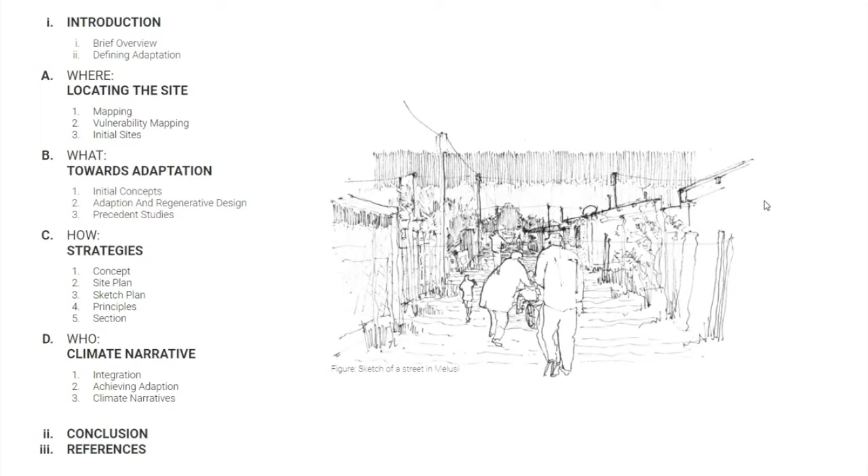I'll introduce the project and its intention, breaking it down into where it's located, what the intervention is, how it will be implemented, and who it's meant for, while also reflecting on the success of the process at the end.

This is Melusi, or a view into the formalizing parts of the neighborhood, and your first impression is as good as mine. We weren't able to visit the site because of lockdown regulations, but despite that, the brief challenged us to develop a clinic and research center site as a catalyst to implement long-term climate adaptation solutions and achieve climate change transformation.

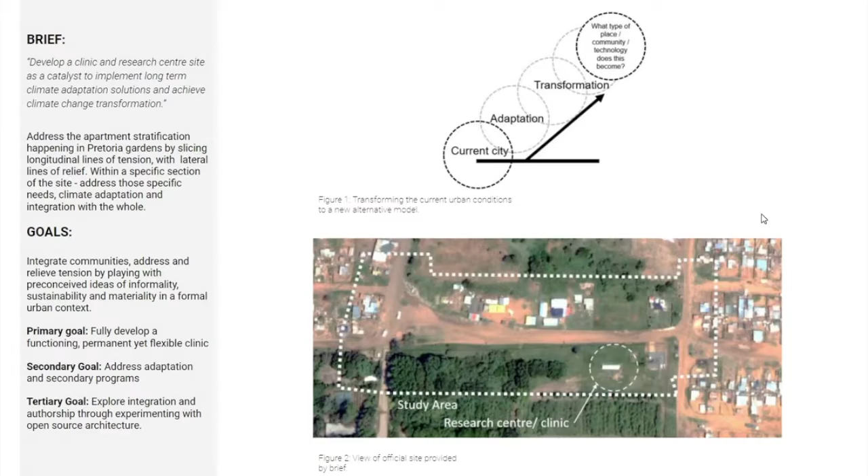I quickly aligned with the brief after our group mapping exercises and spectating previous workshops on what the community wanted and needed. Personally, my goal is to help integrate communities and relieve tension effectively by playing with the preconceived ideas of sustainability, materiality, and informality surrounded by a formal urban context.

Developing a functioning yet flexible permanent clinic was of primary concern, along with supporting programs that further the adaptive argument. Of course, to implement adaptive strategies, we need to understand the concept itself within this context.

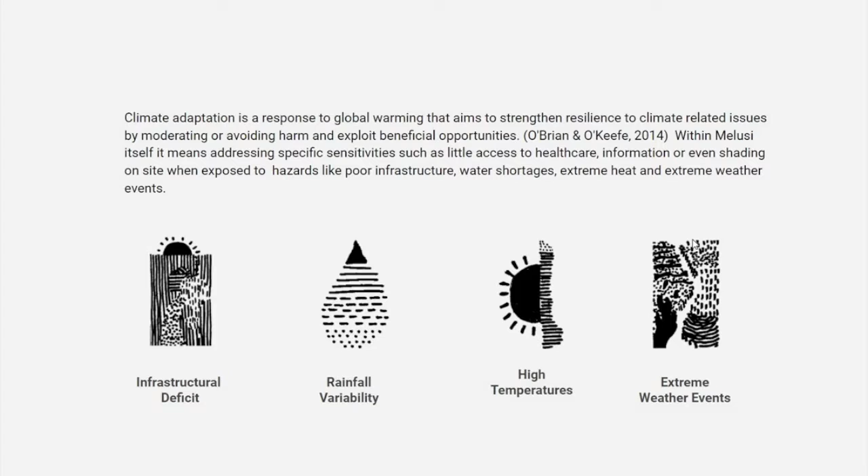Adaptation is a response to global warming that aims to strengthen resilience to climate-related issues by moderating or avoiding harm and exploiting beneficial opportunities. Within Melusi itself, it means addressing specific sensitivities such as little access to healthcare, information, or even shading on site when exposed to hazards like poor infrastructure, water shortages, extreme heat, and extreme weather events. That's a mouthful, but we're only scratching the surface on what effects historic and present marginalization has on the urban sprawl in Pretoria.

So finding the site, Melusi is located northeast to Pretoria CBD and the Daspoort Tunnel. This is significant as it sits on the northern face of the Magaliesberg Range, exposed to the local microclimate and intense solar radiation, wind, and eastern storms.

The growth of the settlement means a drastic decrease in topsoil and vegetation, as is common in these settlements, leading to decreased groundwater absorption and erosion through rocky alluvial soil. Melusi is bounded by surrounding formal neighborhoods, a wetland, and the Southern Hill.

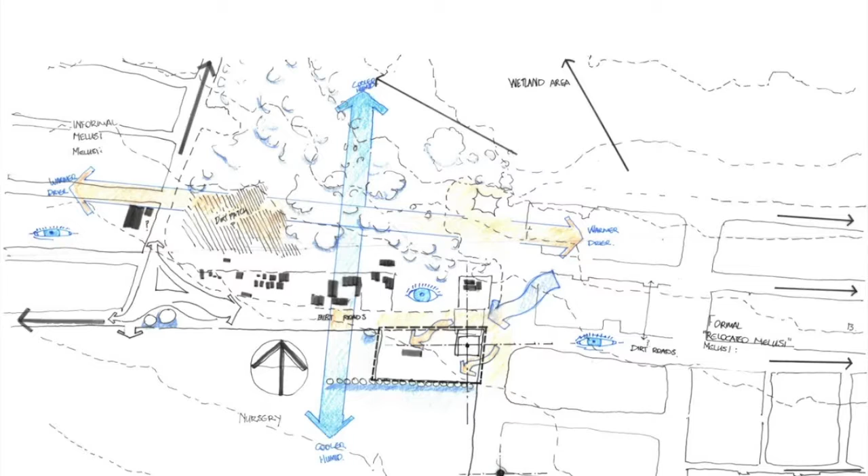As mentioned in our group work, we identified several vulnerabilities Melusi faces. However, through a quasi-quantitative method, as I'll reflect on later, I derived a few of the most pertinent sensitivities weighted against the greatest hazards, in an attempt to find vulnerabilities that, once addressed, could catalyze solutions to other vulnerabilities within Melusi. In retrospect, the success of this process is questionable, but for me, quite notable.

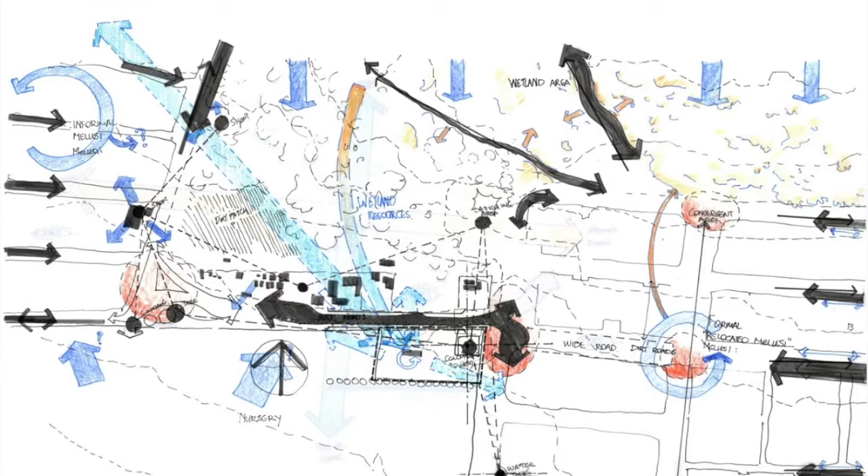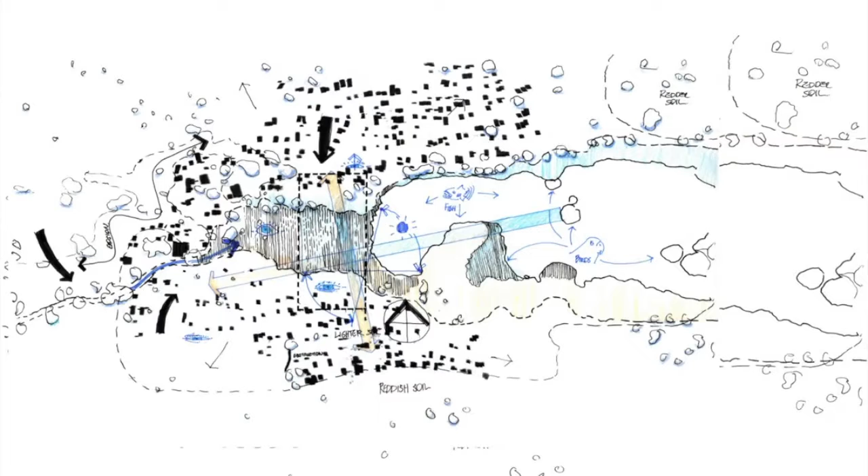Initially, I explored two very different sites. Site A, provided by a municipal nursery that Melusi surrounds, and another Site B on the eastern bank of Melusi's largest dam, located next to a natural drainage channel, mainly to explore the possibilities of different physical attributes, microclimates, different users, and the movement of people and resources through the settlement.

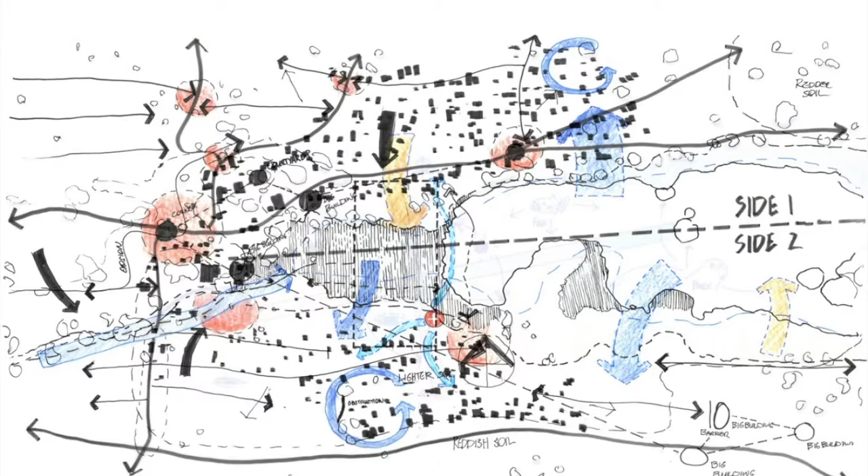Site A is very constrained by the northern road that solely connects Melusi's informal western district and its formalizing eastern district. This is, of course, a great opportunity to connect two communities with this single intervention. I think the nearby nursery and wetland has a marginal effect on the local environment in terms of temperature and humidity, but there are several ECDs, shops, and residents nearby as it's within a node in the settlement.

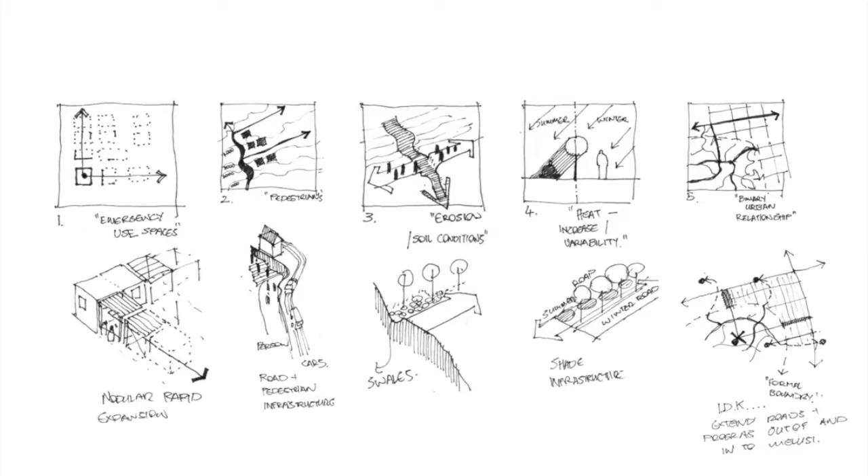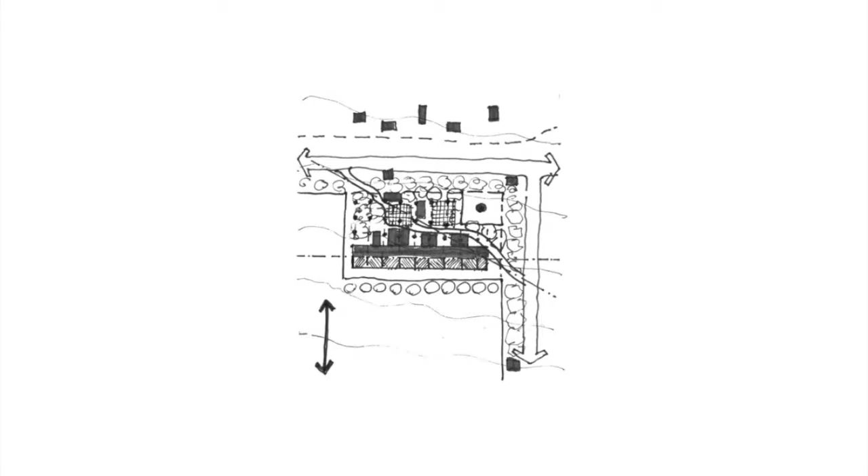Site B is interesting because it's located on a dam that's clearly an obstacle for people moving through Melusi, as shown by footpaths and desire lines through the adjacent but smaller wetland. The dam is a barrier, but could also be a source of water, food, or even passive cooling strategies, and an intervention on its banks could allow for greater, more responsible movement through Melusi and easier access to its resources. I did, however, choose to work on Site A, as it's well documented and understood for the sake of simplicity.

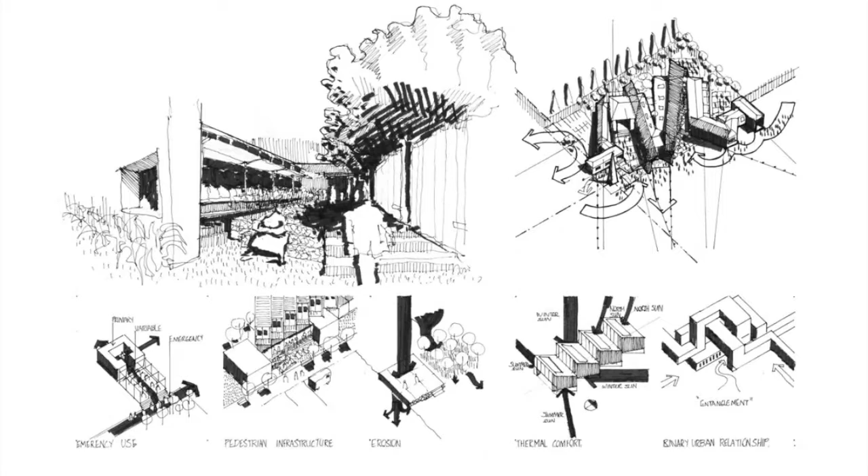Now, given these explorations, what can be done? I initially reacted with five different actions, informed by our mapping, exploration, and a little bit of intuition: providing emergency use spaces, safe accessible pedestrian infrastructure, reducing erosion, improving thermal comfort, and integrating it to the formalizing and formal neighborhoods. Then I derived three concepts through a lens of infrastructure.

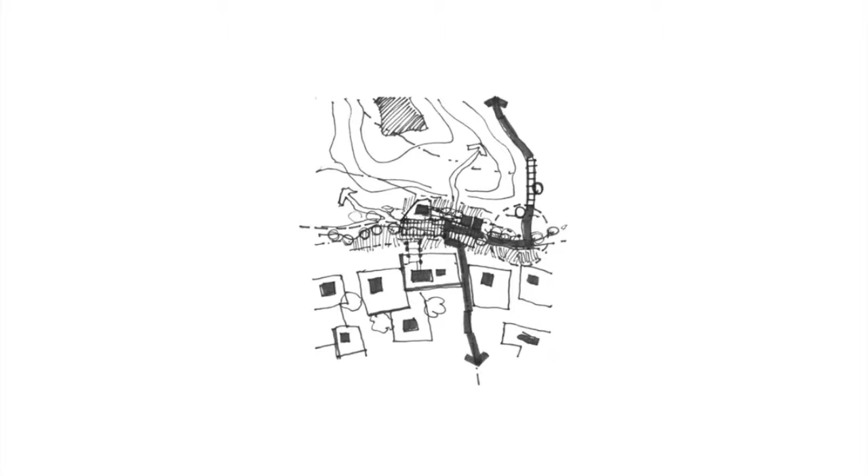The first, Concept A, I speculate on ideas of simplicity, modularity, and expandability, thus the ability to adapt, creating a permanent building on Site A that gives as much public space as it takes, using the adjacent cell phone tower as a landmark to locate an essential emergency health clinic.

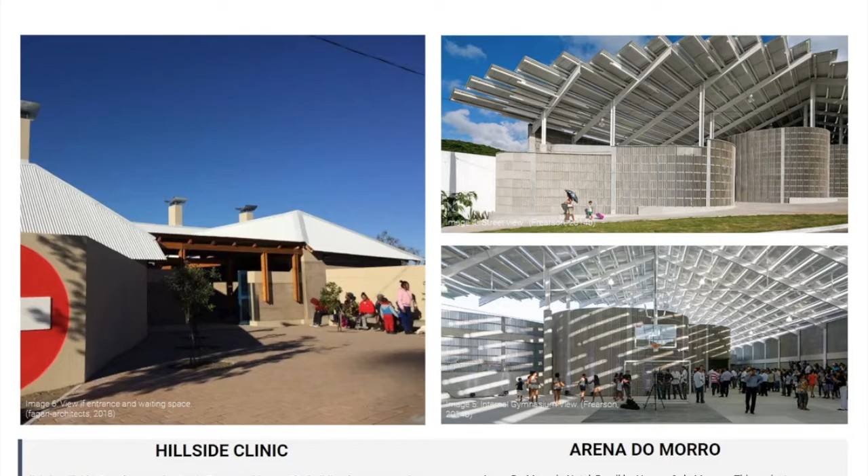Alternatively, a larger, more dramatic intervention might provide many points of interest and programs, where, as a building, it is the infrastructure needed upon which social programs could rely, while also hosting a clinic and research facilities along with other programs as a multifunctional center.

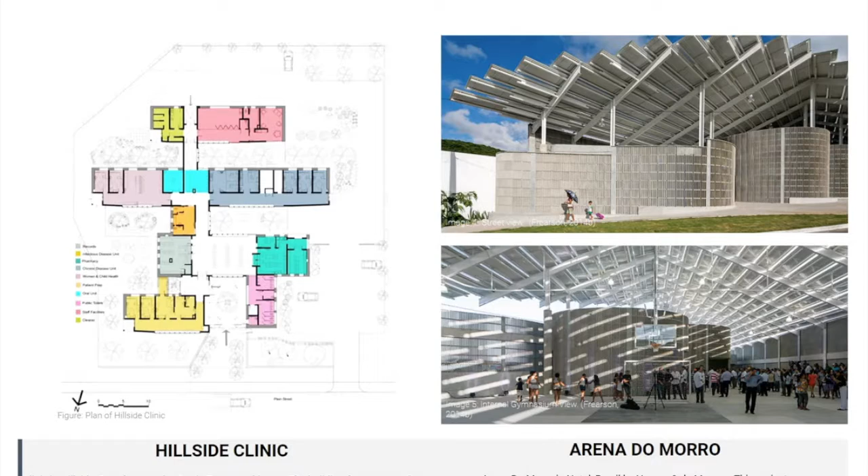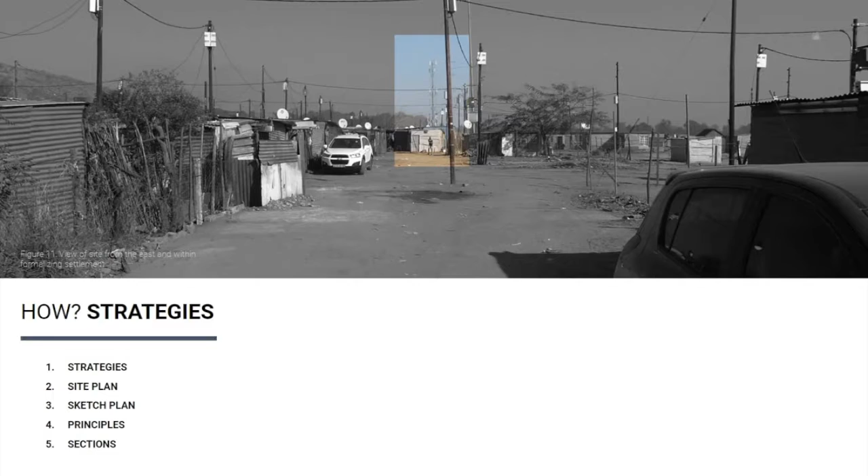However, the third concept excited me the most, and is what I ended up choosing, as a combination of the three. It's a series of distributed small-scale pavilion-like structures that could disperse critical pieces of infrastructure across a much larger portion of Melusi, reacting to local needs and resources. This could increase the overall effectiveness of an intervention and provide many safe spaces, landmarks, and infrastructure.

This is urban acupuncture, if you will, not too dissimilar from the violence prevention through urban upgrading program in the Western Cape. Fundamentally, these ideas explore options that will enhance the potential and regenerative capacity of the site.

Regenerative design is understanding systems, designing for the evolution of that system while partnering with the place where the system exists. This is a new interpretation of sustainability, based on creating constructive relations and acknowledging change while reflecting on failures to create regenerative design solutions.

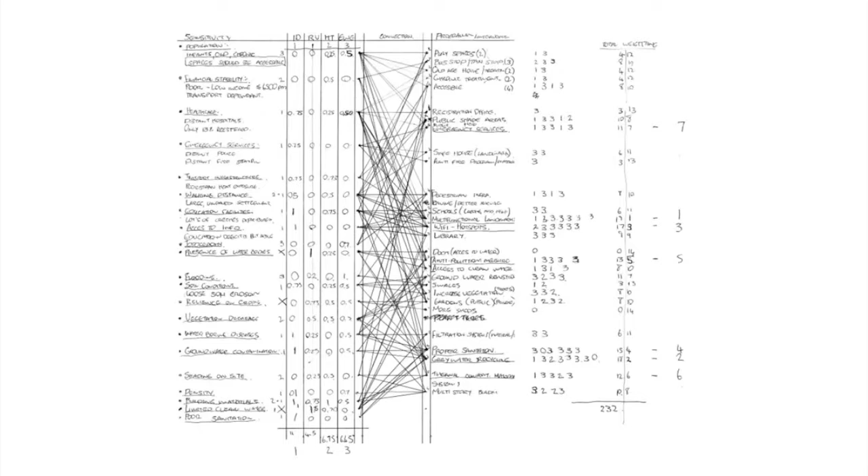This is important for Melusi, as it's growing so rapidly yet at an unsustainable pace to meet its demand for resources, resulting in ecological, social, and economical damage to the city as a whole.

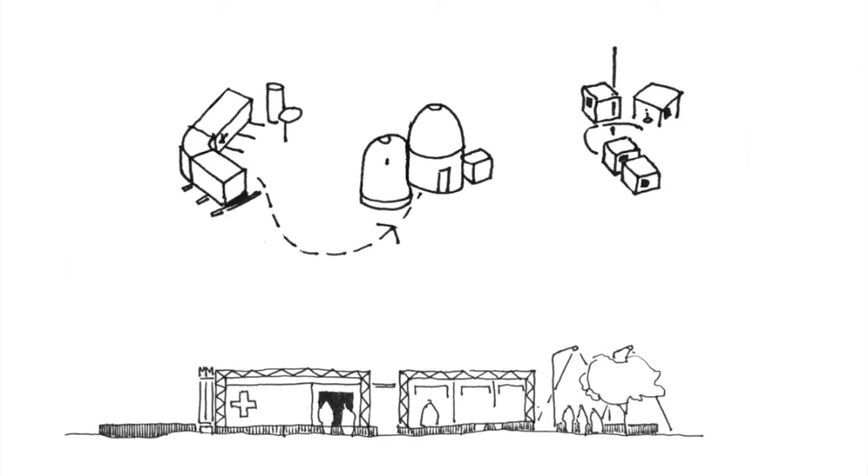But to contextualize these concepts, I studied the local hillside clinic by Harvey Fagan to understand how a clinic could work sustainably. Also an example in Brazil, Arena do Morro by Herzog & de Meuron, which provided a lot of insight into multifunctional spaces as social infrastructure.

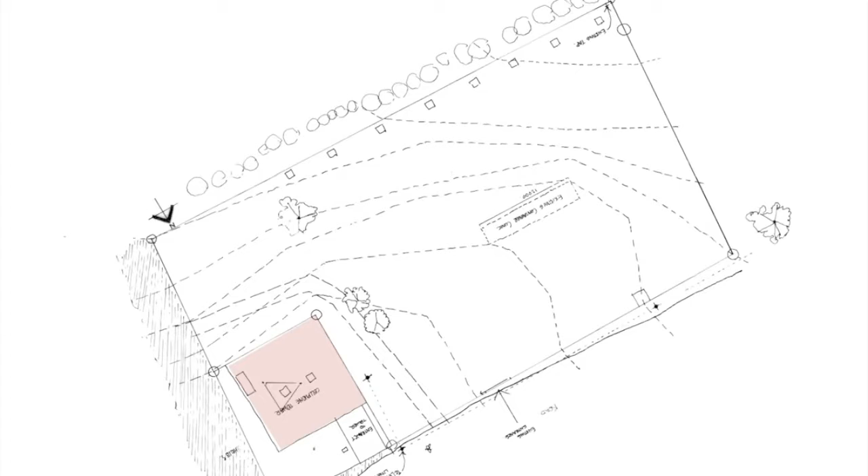This gymnasium was built on the site with an existing concrete playing field, and it was adapted to accommodate a much wider variety of functions.

The structure is very different from its surrounding context, with materiality and being quite generous spatially. And as a passive landmark, it becomes active as you move closer to its semi-transparent skin, or when it's lit from the interior at night.

Our climates are very similar, and it provided a lot of insight into the passive thermal comfort strategies that I could use in Malusi as well.

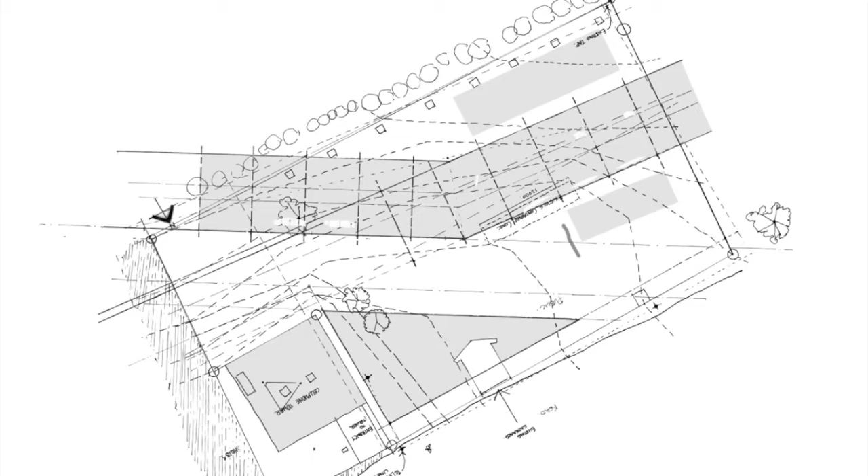Speaking of strategies, as mentioned before, I already isolated the most important sensitivities and programs. The challenge was prioritizing programs that are consistent with the needs of the COPC, as well as the goals of climate adaptation in mind. The programs were sorted.

I sorted the programs according to their weighted importance to allow for an intervention that could adapt and evolve from a small, permanent, yet primary clinic, expanded through secondary social programs into a comprehensive intervention with simple tertiary amenities like shading and seating on site.

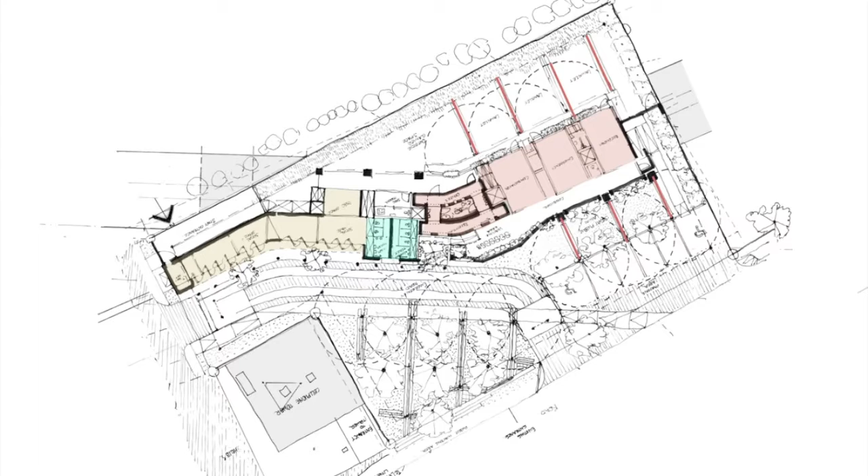This is well aligned with the three main end users: the medical staff and the researchers, as well as the public, and especially pedestrians. The need for medical services, a sensitive population, and a still formalizing Melusi really emphasizes the need for healthcare infrastructure.

But as we saw with the pandemic, it also needs to be able to adapt quickly for emergencies. Yet again, it should also be able to evolve incrementally.

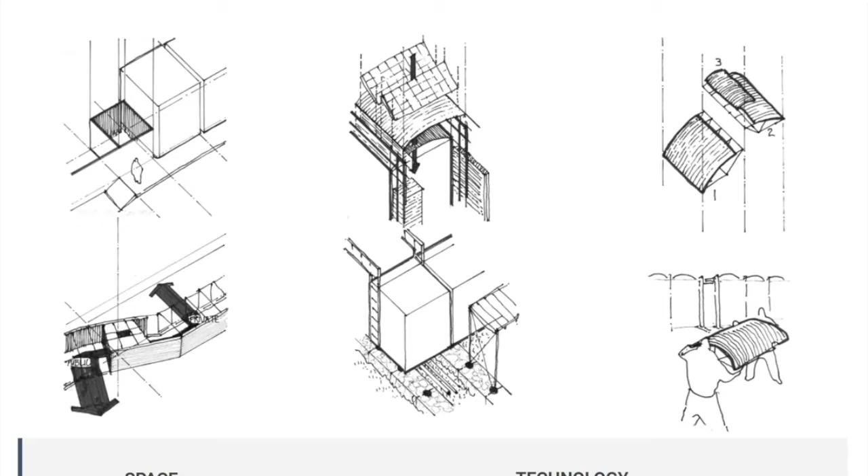This could be achieved through disentangling services and served spaces, and designing secondary spaces with the needs of primary spaces in mind. That is the essence of open architecture, and it would greatly simplify future growth.

Then, through resilient building technology, a structural framework could anticipate change, accommodate different materials, methods, and needs, as every intervention is really located in its own slightly unique context.

I determined all of these necessary functions for a clinic, social spaces, and a public space, and related them spatially as a useful exercise to understand the complex needs of all these programs.

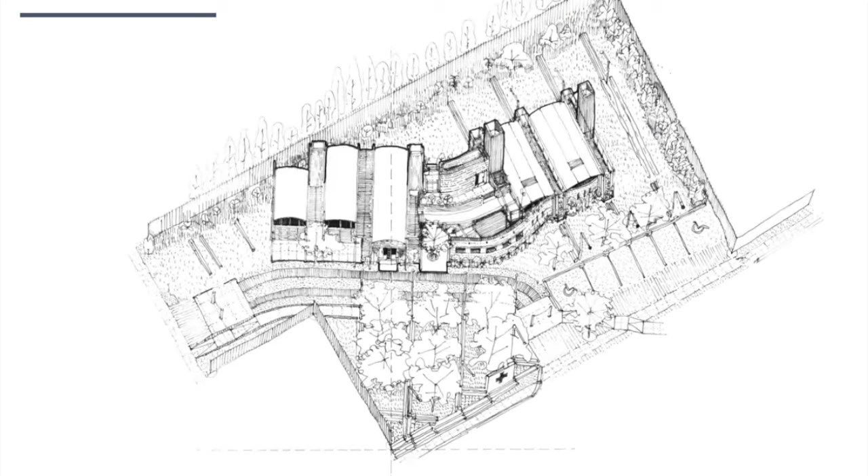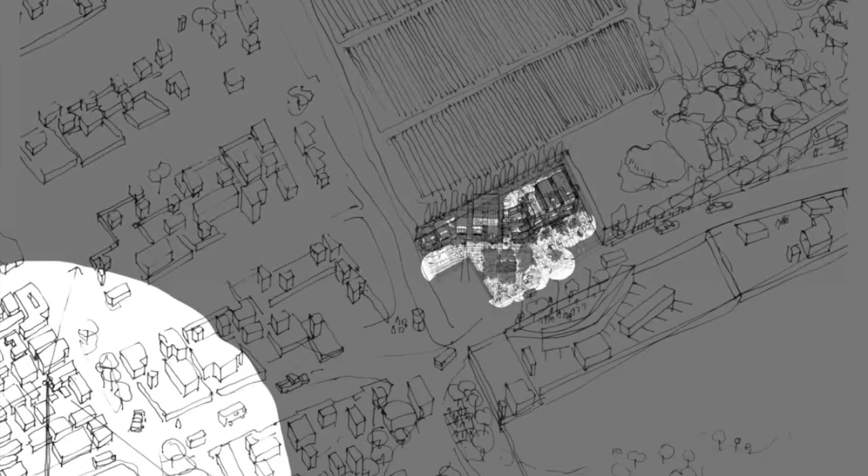The nature and location of the site allowed for northern and western entrances, separated by an enclosed cell phone tower. As mentioned before, the trees to the south and adjacent public roads, and the site's orientation, had me come up with a generous master plan with a diagonal footpath through the site.

This is supposed to be a much smaller intervention, one that allowed for a lot more public space, especially north of the main facade.

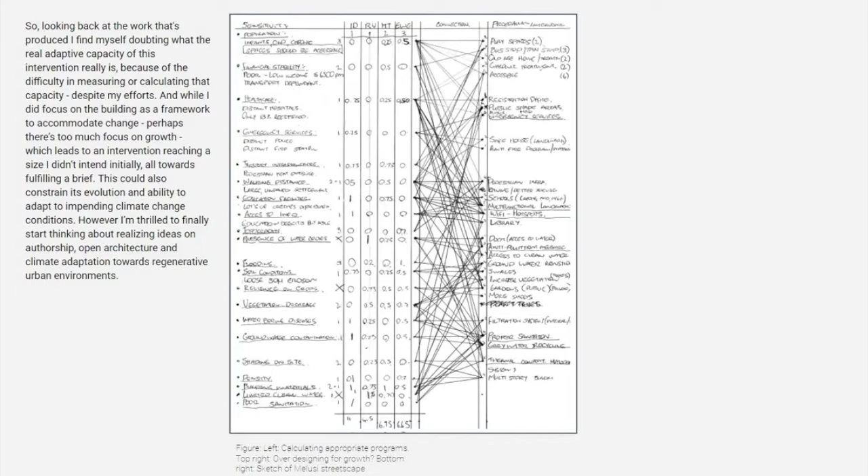Then I derived a structural grid based on the dimensions of a 6-meter shipping container, a maximum depth of 9 meters to maintain good natural light, and 2-meter wide service cores for services and future vertical circulation. The building and road allowed for several varied public and private open spaces to accommodate different types of pedestrians and users.

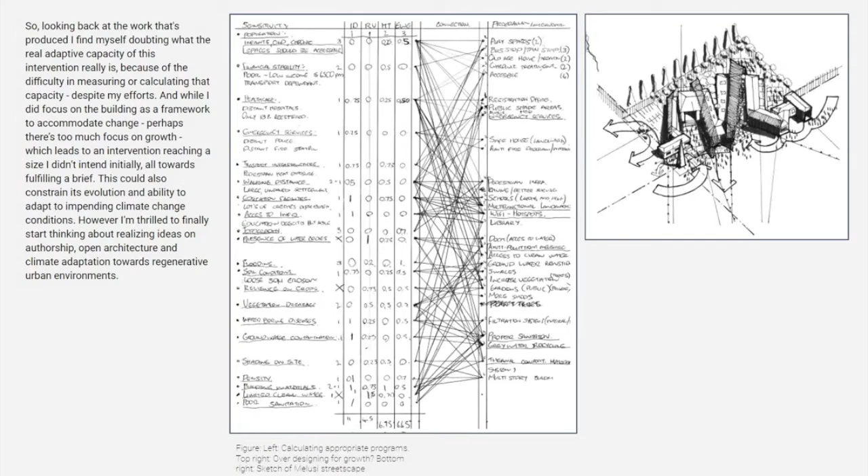On plan, a functional administrative core was flanked by medical spaces to the east, with required services like a reception and waiting spaces. A solid northern facade provided privacy and thermal mass.

To the west, the multifunctional wing houses meeting spaces, a safe house, information space, and a security checkpoint. This wing is adaptable and opens up to northern verandas, trees, and the public area in front.

The last of which is served by ablutions, trees for shading, and structures I call rails. These rails are pre-built with the expansion of the clinic in mind, but are available for secondary and temporary structures to use as foundations, protected service lines, or even just seating for the public.

This is core to the intervention, one that provides the infrastructure needed to create different yet adequate spaces through the use of appropriate building technology.

Building technology that allows users to adapt their climate and integrate with their environment over time to create a narrative, a climate narrative.

The intention of the project is to become the seed for new growth, while regenerating the systems the building should come to reflect as it evolves through time.

To eventually become an integral part of Melusi, as one of many landmark facilities the communities surrounding it can call their own.

So, looking back at the work that produced, I find myself doubting what the real adaptive capacity of this intervention really is, because of the difficulty in measuring or calculating that capacity, despite my efforts.